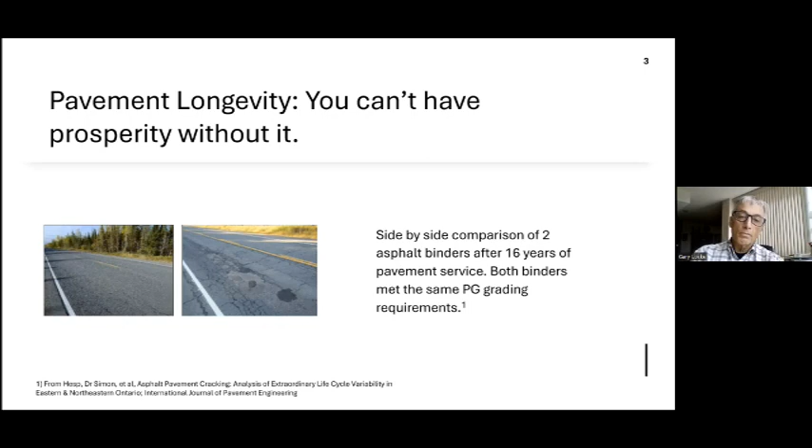Okay, so it really is a match made in heaven. It could be. If you think about what the world needs, it needs more high quality and longer lasting asphalt. And Ontario is included in that, by the way. What do we actually have? Well, we have a resource. Western Canadian heavy crude and bitumen make some of the best asphalts in the world. And there's lots of it, lots of bitumen, that is.

The other thing is, we believe fossil fuel demand in North America has peaked and it's on the way down. As more electric vehicles populate the roads, we're going to see reduced crude running in North America. If we reduce the amount of crude processed for fuels, the problem might be that we won't make enough high quality asphalt, because we won't have the opportunity to choose asphalt crudes and make as much as we need. So that could be an imbalance in the market.

The other thing about fossil fuels and making them from oil sands bitumen is that the carbon intensity is very high. We know that. We've been reminded of that many times. But the good news is that the carbon intensity of making asphalt from oil sands is much lower. And I'm going to show a little of that later in the presentation.

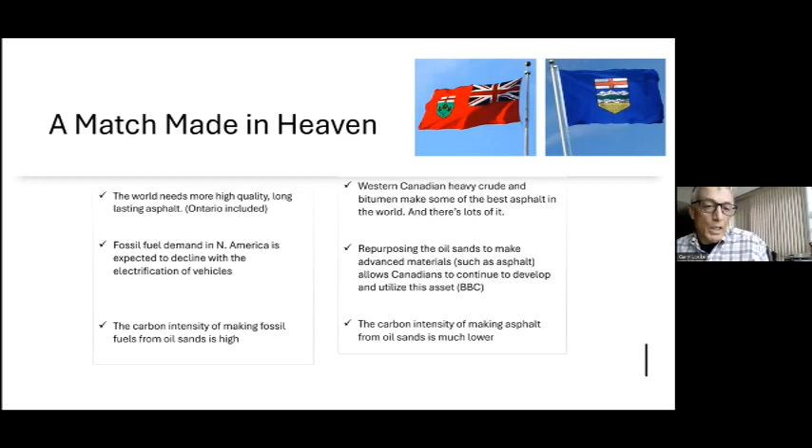But first, a couple words about definition. When we talk about asphalt binder or asphalt cement, often in this presentation I've shortened it to asphalt, if you allow me to do that. We have a description of what it is and what it looks like. It's primarily used for road construction, et cetera. The second word is bitumen. In most countries in the world, the words bitumen and asphalt would be synonymous, because that's the way they refer to it. Not so in this country.

I take the liberty here to say that we're going to continue to define bitumen as the material that we extract from the oil sands formation, whether it's by surface mining or in situ or whatever the case may be. Often, of course, we add diluent to make it flow better, but the bitumen is the material we consider the starting point for making asphalt.

And then asphalt pavement: by putting the word pavement behind it, we're talking about the combination mix of asphalt binder, the stone, the sand aggregate, and additives. And of course we lay it in courses, layers, on the roads, and build up the necessary strength and elasticity properties needed.

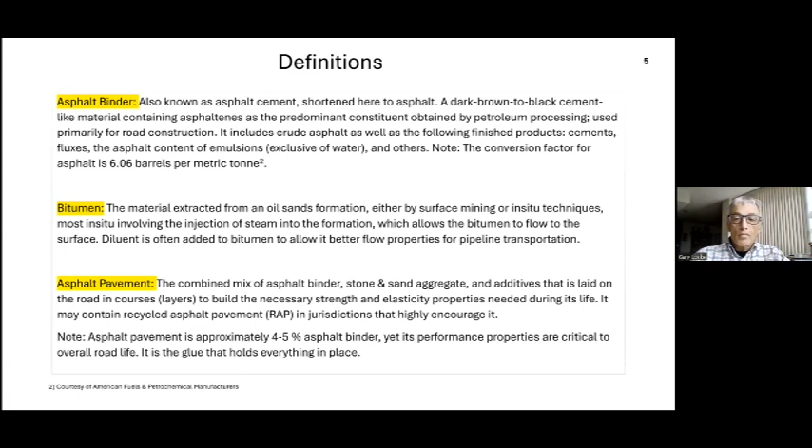So making asphalt from crude oil or bitumen. Most important thing, if there's one thing you take away from today, is that you've got to have the right molecules in the feed. That's the only way you'll make high quality asphalt. Well, what are the high qualities? A lot of times we talk about asphaltenes, and that's a family of compounds, a very complex family of compounds. But it's got to be the right amount of asphaltenes and the resins that often just keep it well dispersed.

Because what you're really doing is trading off stiffness for ductility here. In other words, if I put bitumen through a solvent deasphalting process, it might not necessarily make the best asphalt in the world, because you might have too much concentration of asphaltenes and you'd have a material that would be stiff, and it would probably be more prone to cracking, et cetera.

Some of the other things I want to mention about asphalt and making the right stuff: it should be low volatility, because it has to prevent flash issues. And not only that, but with people working on roads being in contact with it, you want a low amount of volatile material for exposure purposes.

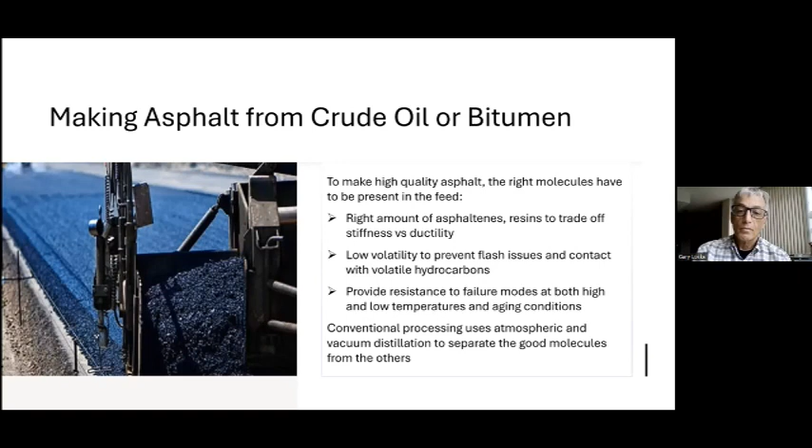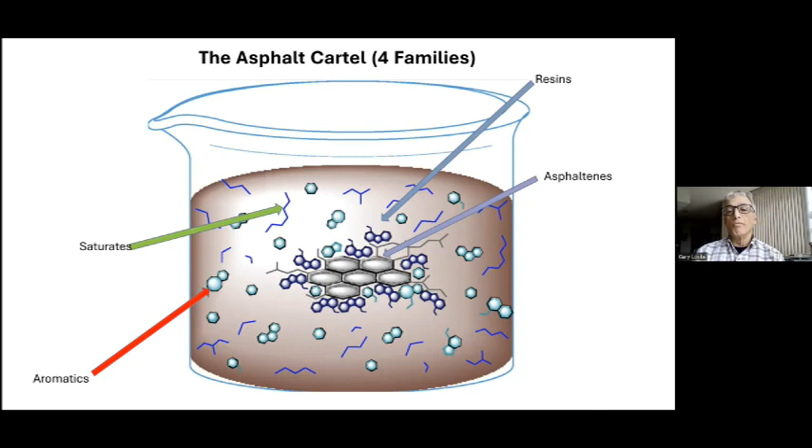So this is what I call the cartel. And the cartel is 4 families. If I had a beaker of asphalt here in front of you, those 4 families are shown, right? You've got the asphaltenes, the very highly complex molecules, often dispersed by the resin phase. And then you have aromatics. And even in asphalt samples, you have some degree of saturates as well. So these are the 4 very different types of molecules that form the family.

Now, a couple of things I wanted to mention before we get into it is really about how you make a softer or a harder asphalt. This is a bit of distillation 101 to start. So if I have, in this case, a diluted bitumen called AWB, Access Western Blend, and I have a true boiling point curve for it, what it shows is, as you distill more and more of that sample, the temperature rises. These are various components of AWB that are distilled, and the blue line is the relationship between percent off and temperature.

Now, unfortunately, the world is not a perfect place. If you try to distill this in both an atmospheric and a vacuum distillation column, the four materials shown here, the diluent being the lightest, the AGO, atmospheric gas oil, next, vacuum gas oil next, and the heaviest being asphalt, what you'd actually see is that the diluent, for example, would have a longer tail on the back end.

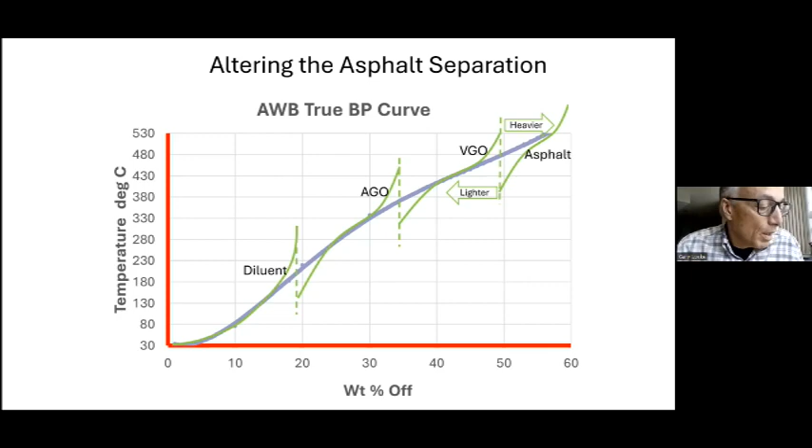So let's talk a little bit about SuperPave PG grading, performance grading system. Prior to SuperPave, in the beginning, there was the penetration test, right? And the penetration test from CGSB, the Canadian General Standards Board, was really a measurement of physical properties of the asphalt. Now that's a good start, but when you're talking about measuring the performance of the asphalt, it's better if you can measure them directly in terms of what they're going to do in the field.

So that's what we do now with the SuperPave PG grading system: we have tests that are more relatable to what the asphalt's going to see in terms of service. And so it's things like the stresses and strains of the binder and how they behave to various tests with the rheometer and so forth, both at low temperature and at high temperature, because both can affect the failure mode. So PG grading is really about finding the limits to high temperature and the limits to low temperature under which this asphalt will perform.

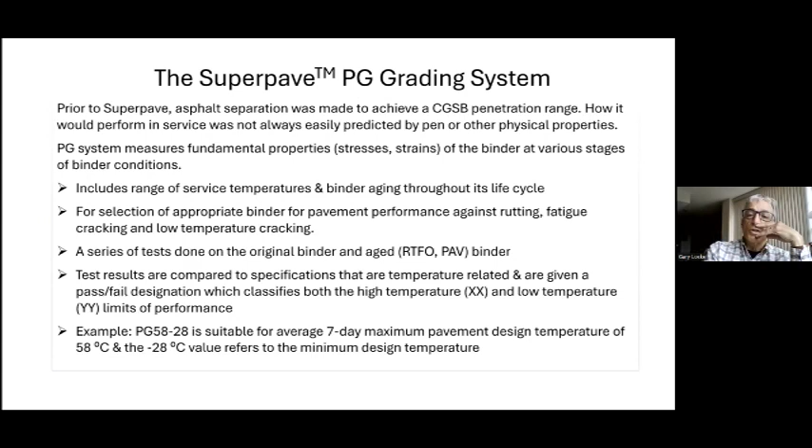And the example shown at the bottom, PG 58-28, means that this asphalt is suitable for an average 7-day maximum pavement design temperature of 58 degrees C. And on the low temperature side, the minus 28 value refers to the minimum design temperature. So this would be how you interpret PG grading. And of course, it's going to be a property of other things besides the temperature.

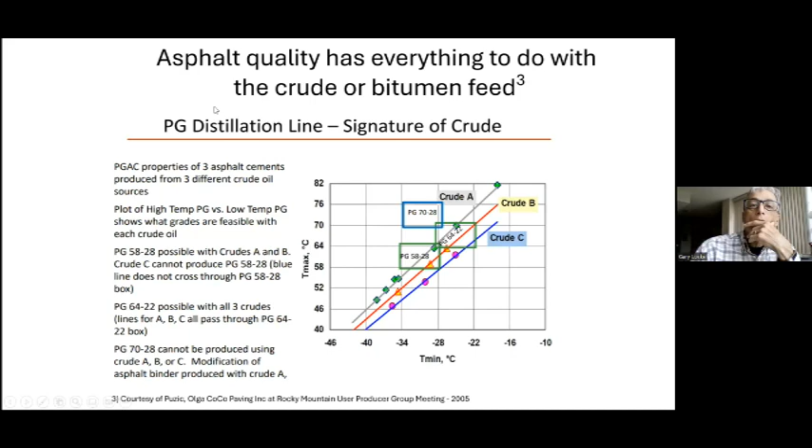Okay, let's see, anything else I need to mention here? Okay, try to get this thing going again. Here we go.

So very important. We've just talked a little bit about PG grading, and if we have a PG 58-28, what does that mean? Does that tell us anything about pavement longevity? Well, the sad news is that you can make a PG 58-28 that won't necessarily last, won't have pavement longevity, even though it'll make the initial specs for PG 58-28. And that's because there are certain practices that can be problematic.

For example, if I take this bitumen and distill it to make PG 58-28, but I decide to distill it much deeper at a much higher temperature, I could make a very hard asphalt, could be a PG 70 or whatnot, and then I could blend back into it something which we call a softening agent. And generally, softening agents have been problematic in that the molecules may not be entirely compatible. And so you can meet all the PG specs for a given service, but you may find that material doesn't last. And so what do you do if the PG system itself can't tell you everything you need to know?

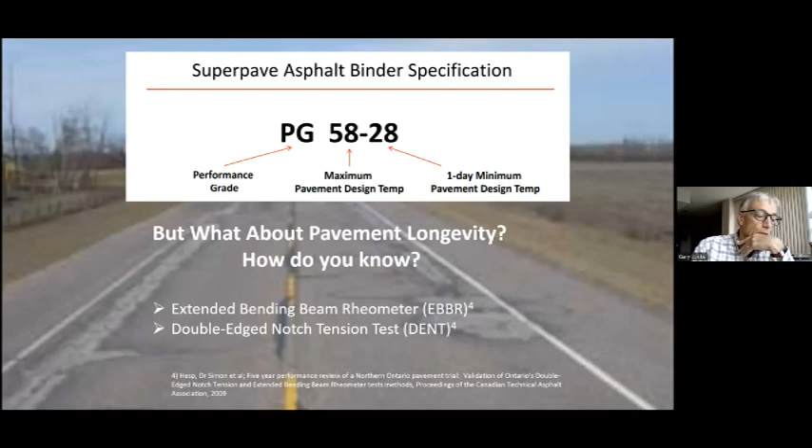And the other test that's useful is the double-edged notch tension test. And the intent here is to actually measure what the resistance to ductile failure will be in the intermediate temperature range. So these are two tests that can help us determine whether or not this asphalt will last. And I'm sure there are many others that are used by road builders today. All right, so that's fortunate.

Now, I think the last topic we wanted to talk about is greenhouse gas emissions from making asphalt. So there's basically three things I wanted to cover here. First one is about the trends we are seeing. Will governments, for example, like Ministry of Transportation Ontario, will they care? Will road builders care about greenhouse gas emissions and carbon intensity? The other thing I want to do is spend a few minutes just reviewing what scope 1, 2, and 3 emissions are and how they might relate to asphalt. And I also wanted to do a bit of a comparison between asphalt emissions and fossil fuel emissions, both of them coming from bitumen.

So just to cover the trends, I think pretty well everybody out there that's big in the asphalt business would say there's no premium yet that green asphalt, if there's such a thing, can demand in the marketplace. There are a lot of provincial jurisdictions that are seeing pressure to buy green, and I guess many of the suppliers are concerned about will those contracts be awarded based on emissions or not. So we're not seeing anything there yet.

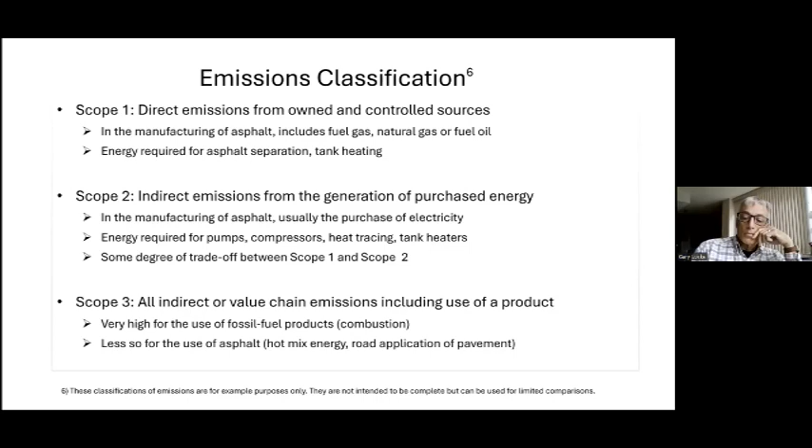We're taking a barrel of bitumen and we're sending it through an upgrader. You'll make some coke, you'll make some sulfur, some fuel gas. But generally, most of what you make ultimately will come out as gasoline, diesel, maybe jet fuel. And those components are blended, they're transported, and then they are used. And in almost all cases, they are burnt for the fuel value. So that's bitumen to fossil fuels.

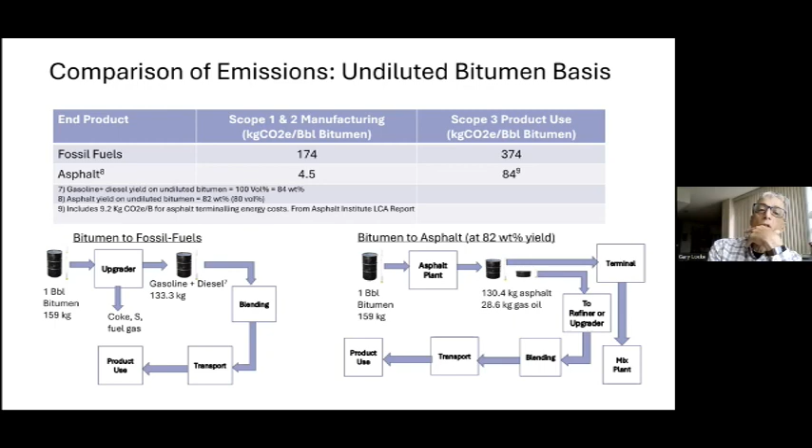Now on the scope 3 side, again, you can see a fair difference for the fossil fuels, much higher at 400 kilograms of CO2 equivalent per barrel of bitumen, and asphalt being much lower because we're burning much less of the bitumen barrel to do it. Okay, I'm sure there are some other sources of energy inputs along the way that I haven't accounted for here. And the intent here is really just to show you the magnitude of the numbers and how different they can be.

So in summary, there's no doubt in my mind that increasing asphalt production from heavy Canadian crudes and bitumen is a big opportunity for Canada. The science of making asphalt is well understood, and with minimal technology risk. Carbon intensity, I hope I've been able to show you that the carbon intensity for making asphalt is lower than making fossil fuels from bitumen.

And we also know that technology is strongly supported by Alberta Innovates and the Alberta government under their BBC mandate. So there's quite a match here between what the Alberta government sees and what we see as the opportunity. So the key here is to put asphalt first. We have to make high quality material, and if we're focused on doing that, then the prosperity will follow.